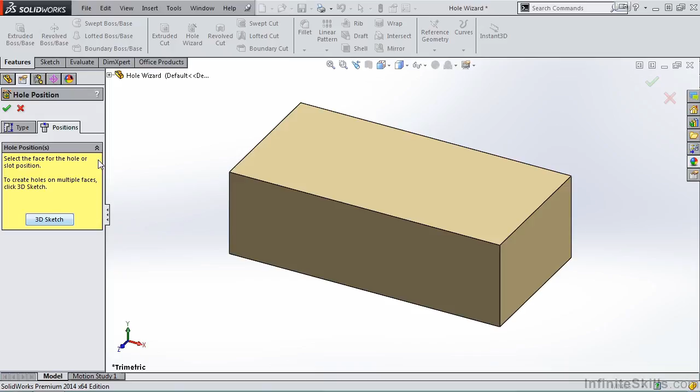And then we have options. These fields are populated based on what we selected above. We're going to leave these options as is, and then switch over to the Position tab. Now, under the Position tab, I can either select a single face and then position the hole multiple times along that face, or if I select the 3D Sketch button, I can position that hole on multiple faces.

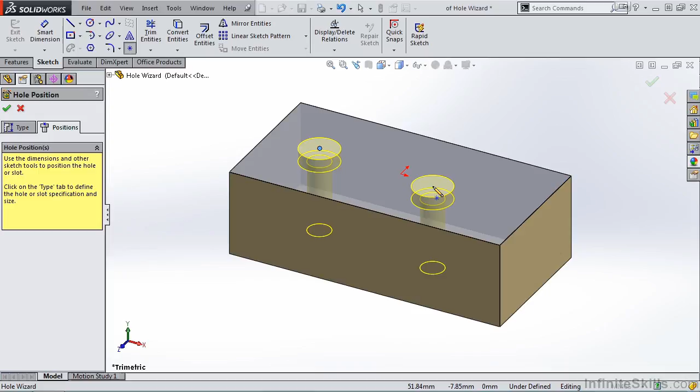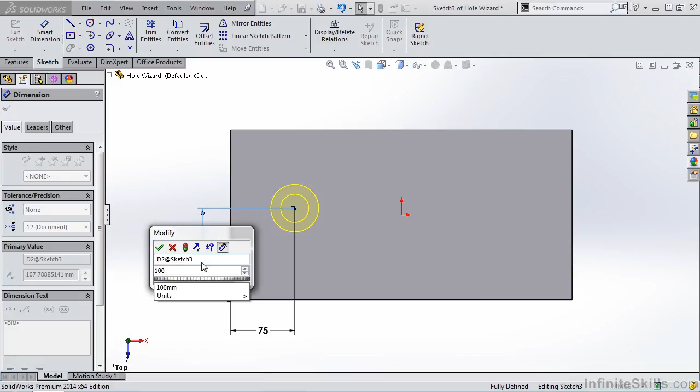I am simply going to select the top face, and as soon as I do that, my pointer turns into the point tool, which allows me to specify a point to position the hole. Now notice as I move my cursor, I can position additional hole features. I'm going to instead hit the escape key and then view normal to the face. And at this time, I can apply geometric relations and smart dimensions for the hole position. So we'll apply a dimension of 75 and another dimension of 100. I'll close out of dimension, close out of the Hole Wizard Property Manager, and notice we have a counterbore feature.

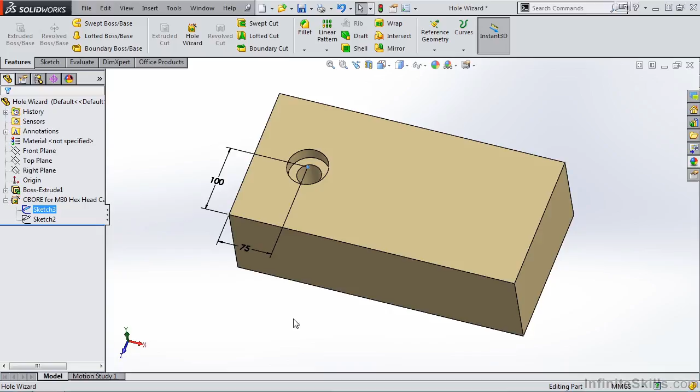Now let's take a look at the Feature Manager tree. We have the feature for Hole Wizard, but if we expand it, we have 2 sketches. The first sketch is for the hole position. If you want to change the hole position, simply edit the sketch. The second sketch is for the profile or the shape of the hole feature. Do not edit this sketch. Instead, edit the feature and make your changes through the Property Manager. So you can edit the sketch for the hole position, but don't edit the sketch for the hole profile.

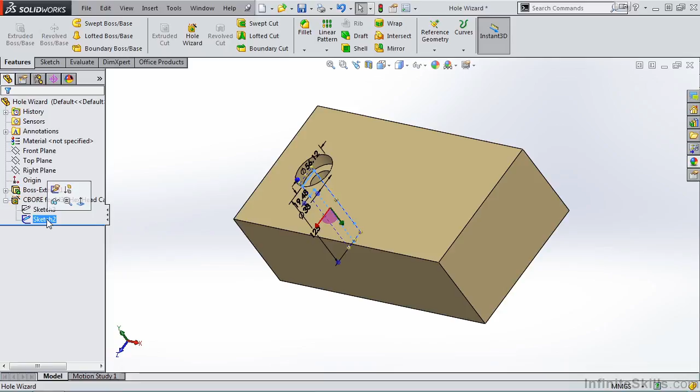Let's create another Hole Wizard feature. This time, we're going to go with a straight tap. Once again, our standard is going to be ANSI metric. We'll use a bottoming tapped hole. And this time, we're going to use a size of M36 by 3.0. We want it to go through all, and the same with the thread. Now, right below this, under Options, we can simply have a tap drill diameter, or we can have a cosmetic thread, or no cosmetic thread. We're going to go with cosmetic thread.

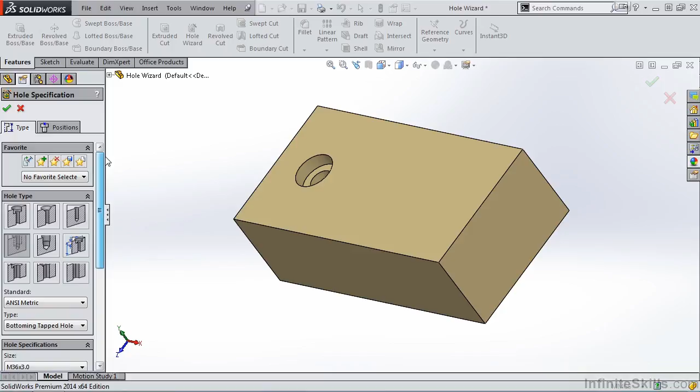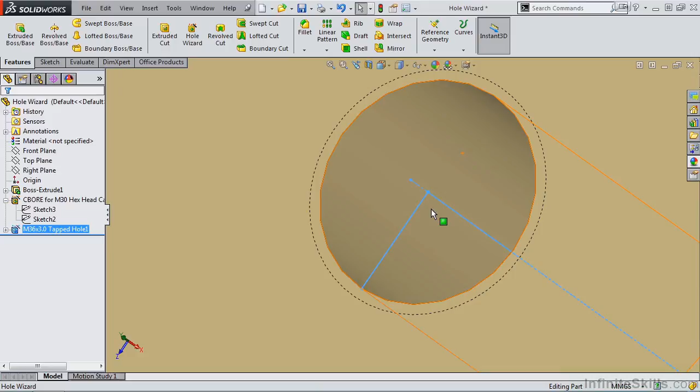I'm going to go back to the top of the Property Manager, select the Position tab, go out to the screen, select this face, and position it. I'm going to close out of the Hole Wizard command. And when I zoom up on this, notice we do not see any threads. Now the reason for that is, in the options, cosmetic threads is not turned on.

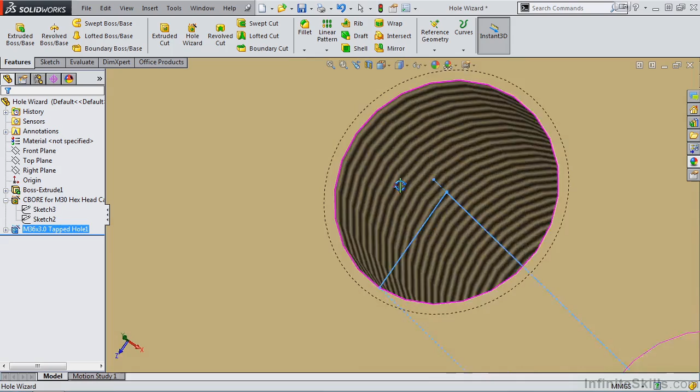So let's go up to the options. The dialog box appears on the screen. We'll change to the Document Properties tab. Go to Detailing, and you want to verify cosmetic threads is checked, along with shaded cosmetic threads. Select OK, and now notice we see cosmetic threads in that hole. Now these are nothing more than a graphic representation of threads, and in SOLIDWORKS we call these cosmetic threads. These are not true threads cut into the cylinder of that feature. They're nothing more than a graphic representation.